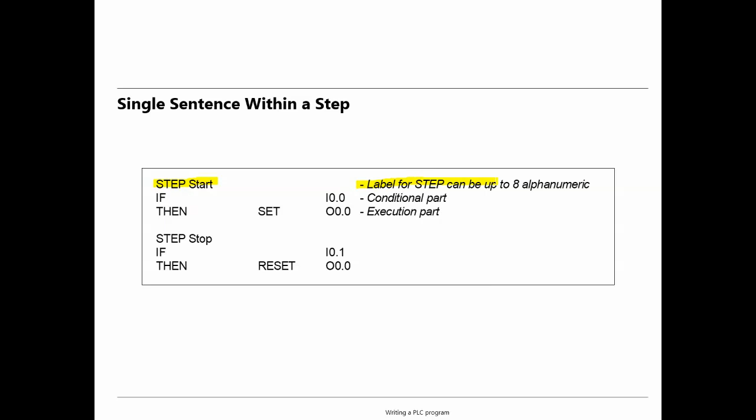And here we have, for example, the conditional part and the execution part. And here we have the step start and reset, and we can write some explanation for that. The condition is in this step; this is the sentence. So if input 0.0, this is the conditional part, and this is the execution part: then set output 0.0. And another step: again the conditional part, if input 0.1, and the execution part, then reset output 0.0.

But later on, if you get involved with software, you will see there are many companies producing PLCs, the hardware, and even if we learn some commands here, they also have some special commands, or they make some modifications regarding the commands. So that means you have to read the handbook of the company that produces the PLC, or participate in a short course to learn about the special commands or special structure of this company's software.

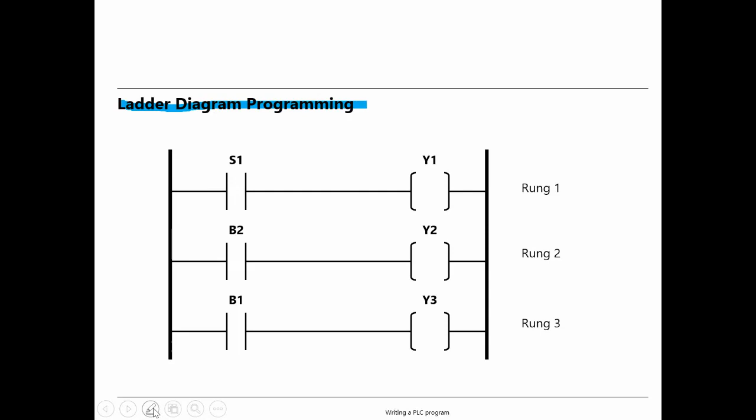So the ladder diagram, what's that? This is the first part, rung 1, rung 2, rung 3, and this is the condition part, if S1. S is a symbolic name, as we already mentioned in our last lesson. Instead of F, S1. S1 is connected to, let's say, input 0.0. There's a cross-reference list or reference list, and in these references all of them are defined. S1 is assigned to the input 0.0.

So these parts, all inputs, S1, B2, B1, and the other parts here, the execution part, Y1, Y2, Y3, we use to address the coils of the valves. If S1 is true, then set Y1. If B2 is true, that means the signal exists, then set Y2. If B1 is true, that means it exists, then set Y3.

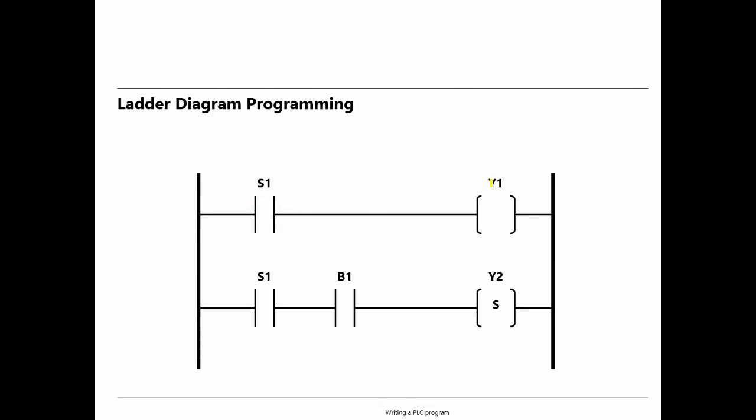Okay. So from the ladder diagram, if B2 is activated, Y will be set regardless of whether S1 was previously activated or not, which we discussed already. And here in the ladder diagram, if S1 is true, then set Y1. And here we have an AND connection, logic AND connection. That means it is connected in series here. If S1 and B1 are true, then set Y2.

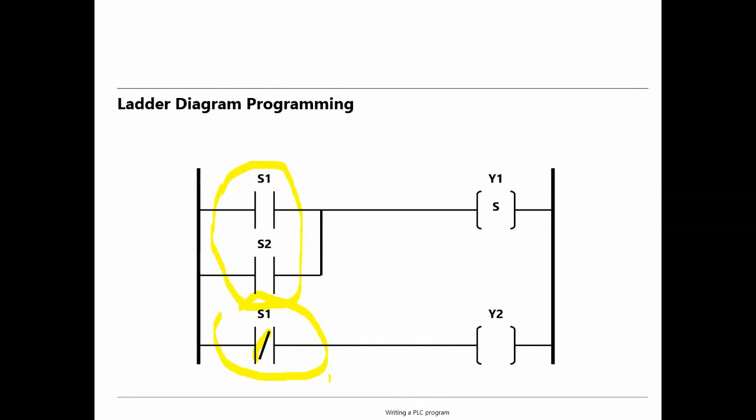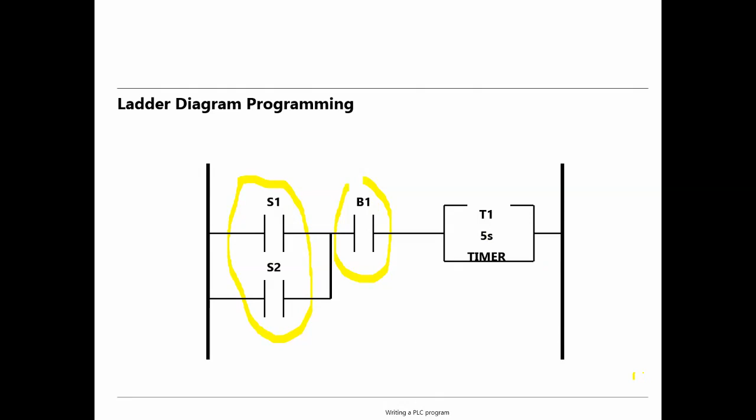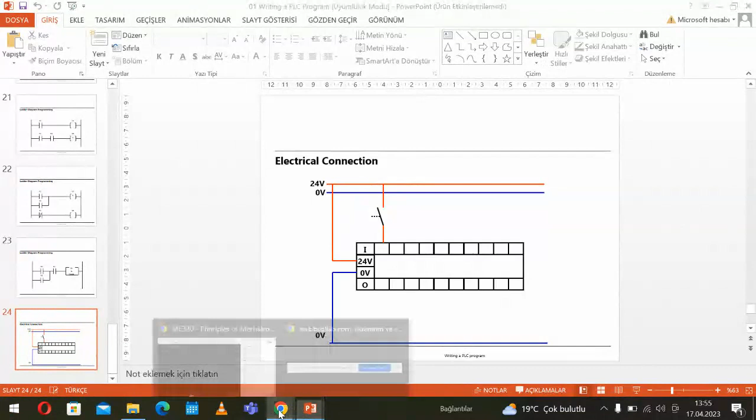Okay, so let's make a short break, 10 minutes. What time is it? Okay, let's say 5 to 2. So we start, let's say, 2 past. And we will work on an example.

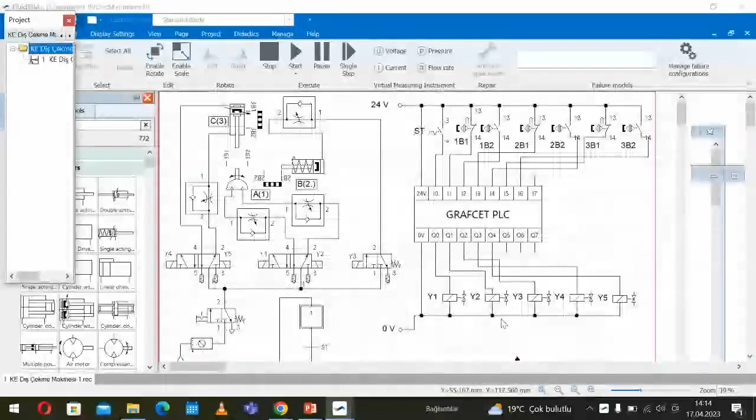I'm going to use two linear actuators. This we did already, you may remember. This is a simple mechatronic system consisting of one linear actuator like this here. Let's start the simulation, and this is our power unit, as you remember. We use pneumatic energy since we use the pneumatic linear actuator here, as we said at the beginning of our lessons.

Can you see the screen? Okay, I guess you see that. I cannot see your response, because I only hear your voice now.

Okay, this simple mechatronic system we created in our previous lessons has one linear actuator, and the linear actuator is a pneumatic linear actuator. That means we use pneumatic energy to do the work.

Could be hydraulic, could be electric, electromechanic, and so on. We discussed it already in the part on actuators. So since we have a linear actuator, we are interested in checking the position of the linear actuator. That means controlling the position of the linear actuator. A linear actuator, you know, executes linear motion.

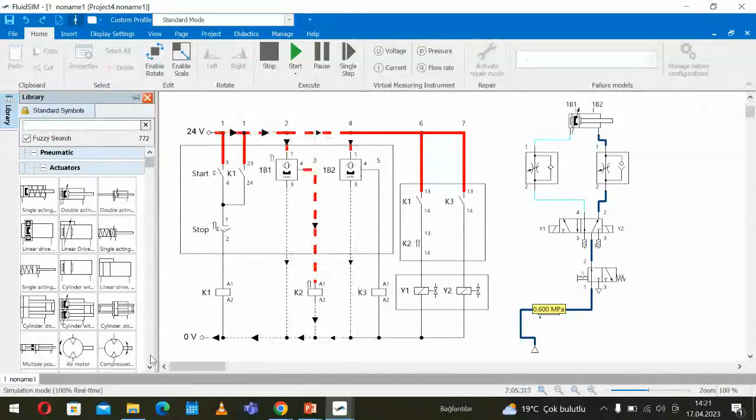So this control system is designed using relays and relay contacts. And we said it is also possible by writing software, using a PLC. We didn't use the PLC here. We just used the relays, and we established the control circuit using the relay contacts. So let's see whether I have it somewhere. I remember we did it.

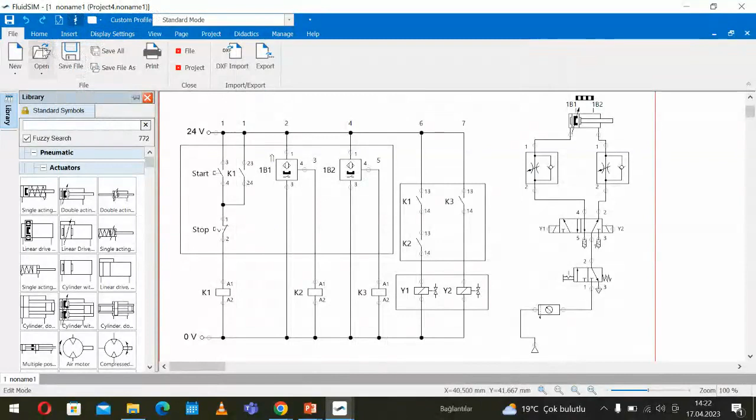Where is it? The pneumatic, is it that? Pneumatic control circuit. Oh. Which one is this? No name project 4. Okay. Project 4, 5. Let's see the 5. What's the 5?

Okay. So this one. Project 5 with PLC. Same project, that means same power unit. We use the PLC here. In this PLC, this is the input part, and this is the output part. All the inputs we connect to the input part, and all the output signals we connect to the output part.

And we also have to connect our PLC to the power unit, to the voltage, 24 volt here connected, and the 0 volt is also connected. You see our 24 volt direct and 0 volt. So if I start the simulation like this, you see we have the energy here, 24 volt direct current, and pneumatic energy also available.

And I have to turn on the pneumatic energy for our linear actuator like this. So then I have pneumatic energy in the power unit and electrical energy for the control system. So again, like our example before realized using relays and relay contacts, if I push the start button here, the first input signal will arrive at the PLC, and then it starts to work like this.

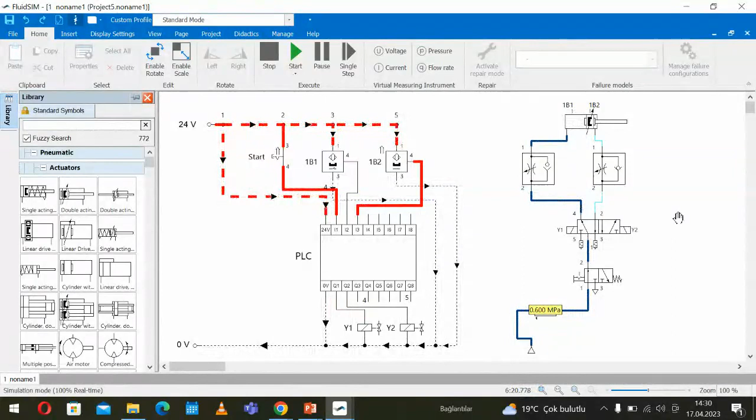Today industrial automation is very important in our industry. All production lines, all assembly lines are getting automated, because we have to produce fast, we have to produce safely. Having humans involved in the production or assembly process to keep the conditions constant is not always simple or beneficial. Therefore, we use automated systems in industry today. We have to produce more, produce precisely, produce the same quality at any time. So industrial automation is very important.

And industrial automation mainly consists of actuators, sensors, network, hardware, and software, whatever you are going to design, as a machine or as a function unit used in the machine. Okay.

So in this example, we have 3 input signals, as you see here: start, 1B1 and 1B2. 1B1 and 1B2 check the position of the linear actuator, and start is to start and to stop. If we push it the first time, it starts, and the second time we push it, it stops at the end of the cycle. And in the PLC we write a program, and it works according to this program.

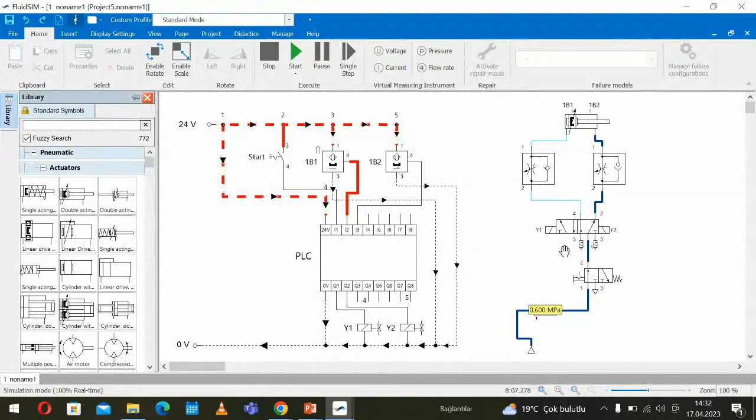What does it mean, it works? The program is executed by the CPU, checking the input signals and what is written in the program, sentence by sentence. According to the inputs and the program, the CPU creates and sets the output signals, which in this example go to Y1 and Y2, the solenoids belonging to the 5/2-way valves, and the 5/2-way valves operate the linear actuators. Do you have any question regarding this simple mechatronic system? No, okay.

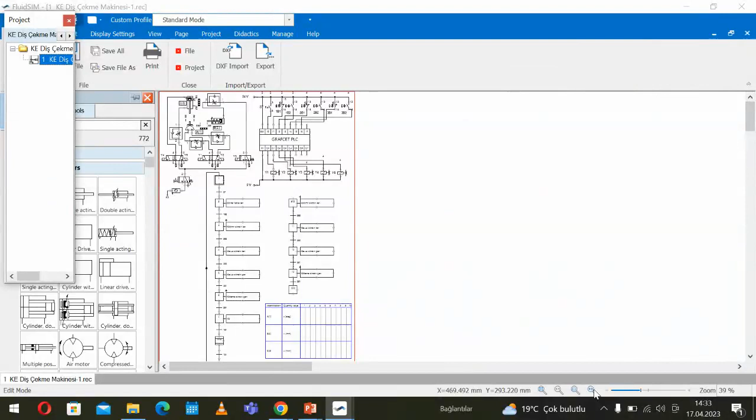So I'm sorry. I will select another one. Pneumatic control manufacturing. Okay, this one. So here we have, you see, we have a problem regarding the view. Where's the view? Okay, here. How can we change the view size? Okay.

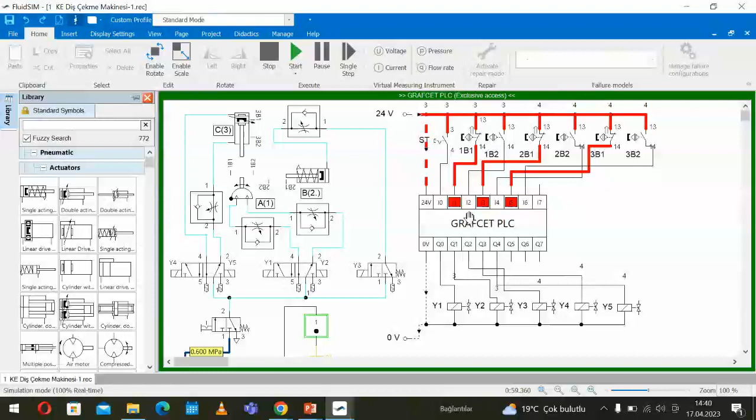We connect all these input signals to the input part of the PLC, and this is the input part here. Some inputs are active - you see now, for example, inputs 1, 3, and 5 are already active. Let's see why they are active. But the start is not active, because the start button is not pushed.

So 1B1 is active - why 1B1? Let's see where 1B1 is. 1B1 is the sensor, the position sensor for the rotary actuator, checking this position - the left position. 1B2 checks the right position. We see here, because the point is indicated, the rotary actuator takes this position, the left position, and since it is in this position, 1B1 is active. Therefore, we get the signal - the PLC gets the signal from 1B1. What about 1B2? 1B2 is not active - both of them cannot be active at the same time on the other side.

And the other one, 2B1, is also active. Let's see where 2B1 is. This is actuator number 2, and 2B1 checks the initial position of actuator 2. We see that the actuator is in the initial position, therefore 2B1 is active, and you see input 3 is active because of that reason.

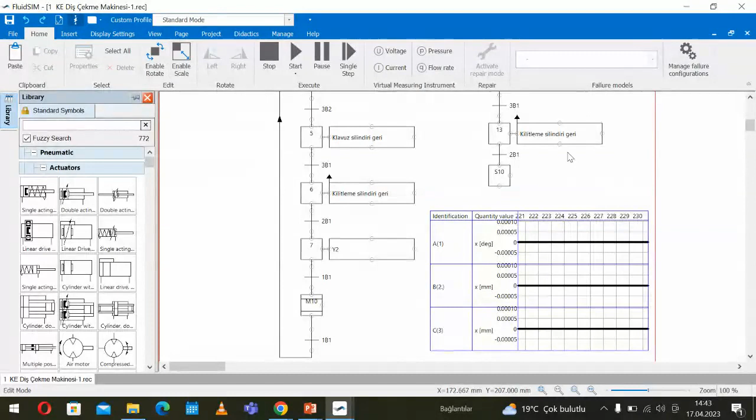M10 means from here, if this condition - this is the conditional part - is fulfilled, then the program jumps to M10. Where is M10? M10 is here, this is a sub-program.

That means, at M10 we have E10, that's input 10, and it comes to this step and continues from here. If it is finished, then it comes back, stops the program at step 10, and from here goes to the start position of the program, back to step 1.

If we have more actuators in our system, the control system gets a little more complicated. That means we have to handle more input and output signals, and maybe consider more complex conditions for the control system. But it is a system - if we learn how to realize a simple mechatronic system with one or two linear or rotary actuators, or mixed, the complex system has the same structure. Therefore it's not a big problem, and I'm sure you can learn and do it.

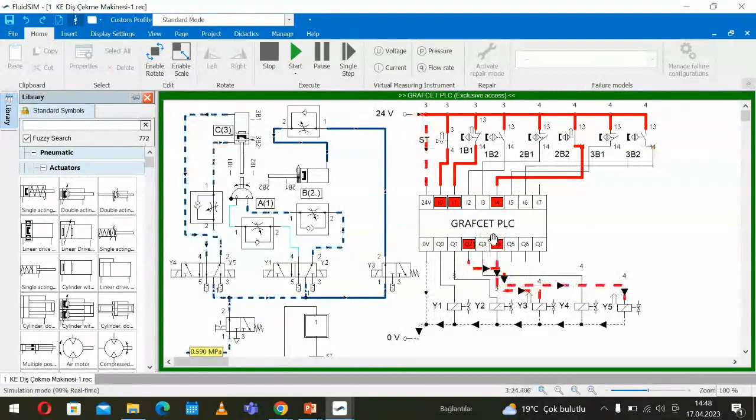That means our control system, PLC, checks the inputs and reads the program written here. You see the program and the sequence of the program: step 1, we'll start step 2, and then step 3. You see green — if the step is active, it gets green like here, then here, and so on. You see the program steps here.

And here you see the motion of the linear actuators are also shown. We have, sorry, one of them is a rotary actuator — this is the rotary actuator, those are the linear actuators. So the rotary actuator takes this position, and the linear actuator fixed, and the other one comes down and makes it cut the thread and goes back, and it repeats. And with this simulation software, we are able to check or to see, to make it visible, all the motion sequence and all those things.

As I mentioned, the first one is the rotary actuator. It takes this position, goes to this position, and stays there for a certain time. This is one position, left — let's say this is the right position, comes to the right position, waits there, and then if it is finished, comes there. In that position, the fixing cylinder fixes, and the drilling happens, and then it repeats again. Comes back, and then it repeats again.

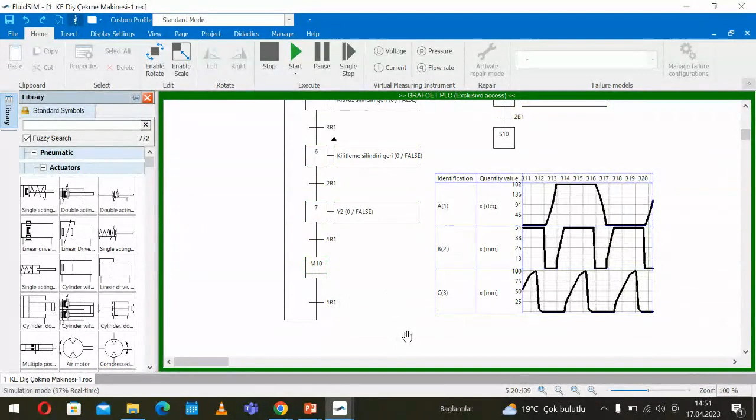Okay, so let's stop it at the end of the cycle. So this is the end of the cycle, and we stop it.

Do you have any question? Is it interesting for you, the simple mechatronic system like this? Maybe you don't listen, huh? Okay.

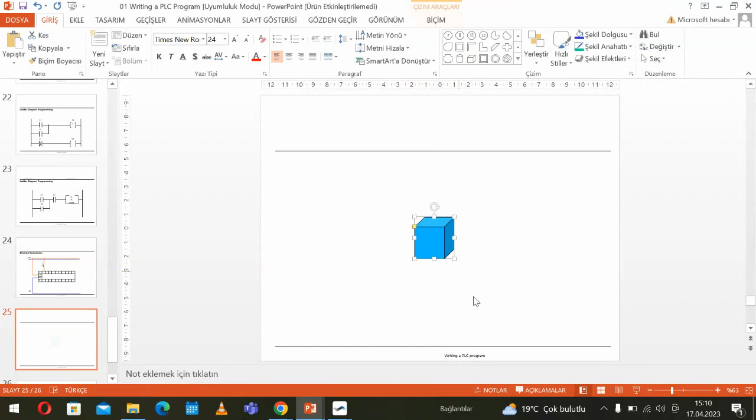A simple mechatronic system consists of two linear actuators. Our scenario is we have one pneumatic cylinder, linear actuator, and for fixing the material, let's say we could have — how can I show? So this is, let's say, our workpiece. Let's have a workpiece here. So we have it. Can you see the screen? Yes, okay, thank you Mohammed, thank you Görkem.

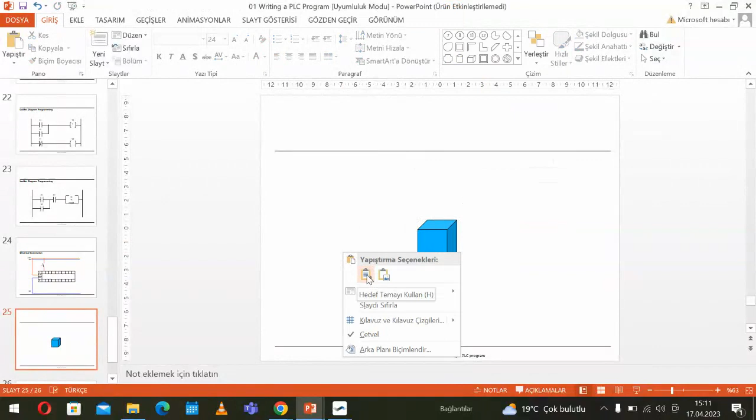Okay, so let's say we have such a workpiece, and we can say this is our workpiece, and establish it. I'm trying to draw the sketch of what we are going to do. Use another color, okay, like this here. Okay, this is the workpiece here somewhere.

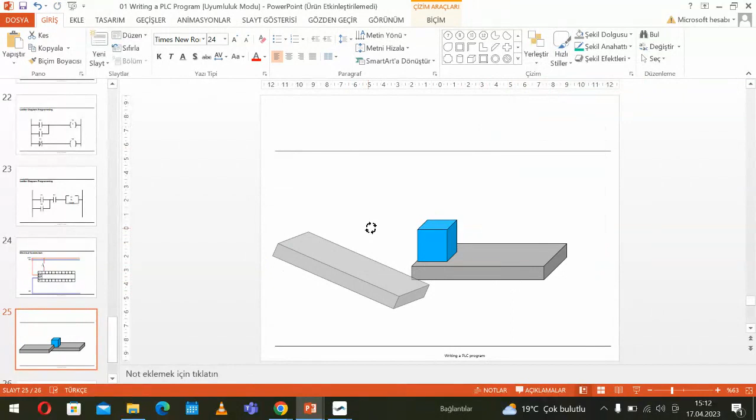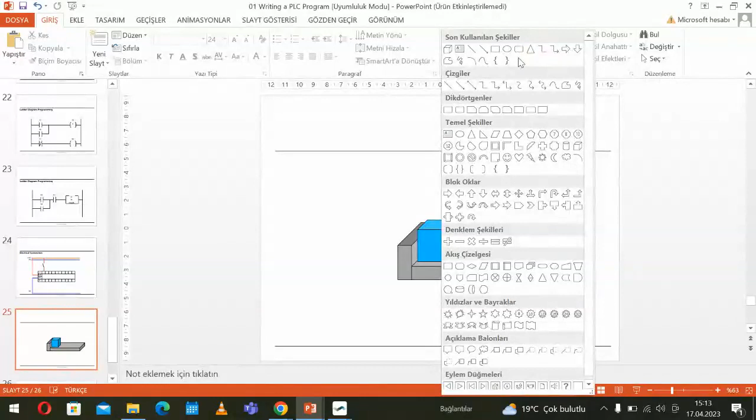And this is another one. Okay, let's. So this is our workpiece, and we want to fix this workpiece somewhere in this position. The linear actuator we are going to use — I can use this one, for example. So this is our linear actuator.

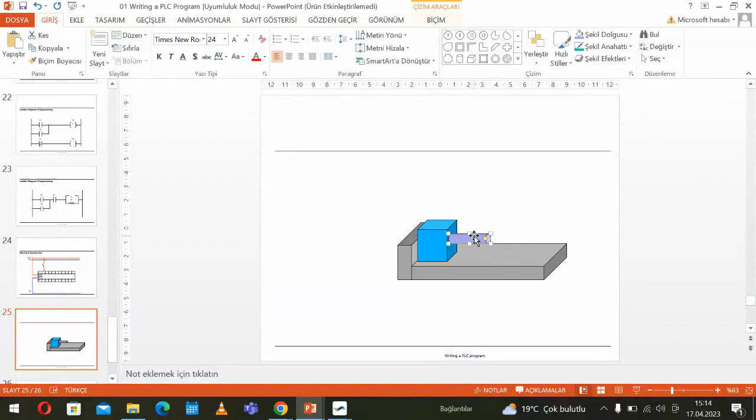One of them is the cylinder we fixed here. Let's choose another color here, maybe this one. So this is our linear actuator and has to be fixed somewhere here. So how can I show that? A linear actuator here. Use this color, okay.

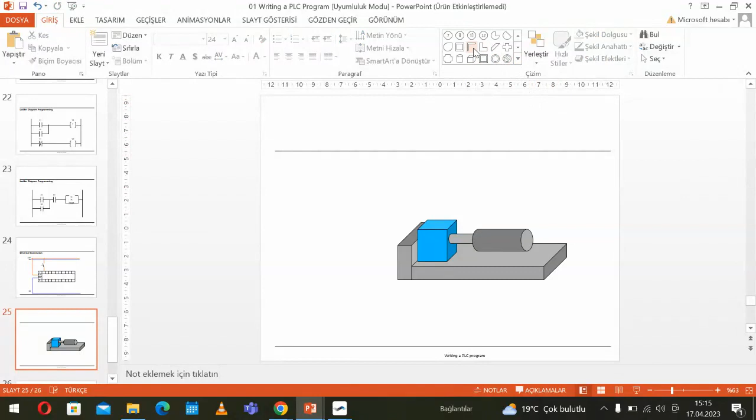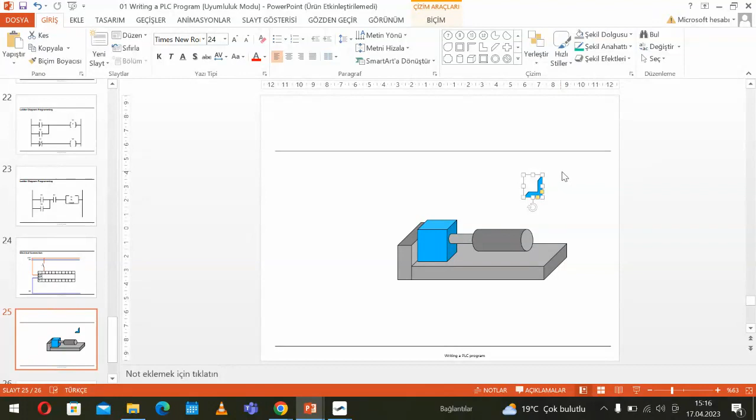Okay, so how can I fix it? I need for this type of component, maybe... okay, let's assume that we can fix it somehow. So this is, okay, our linear actuator — it moves also in vertical direction, like this, huh?

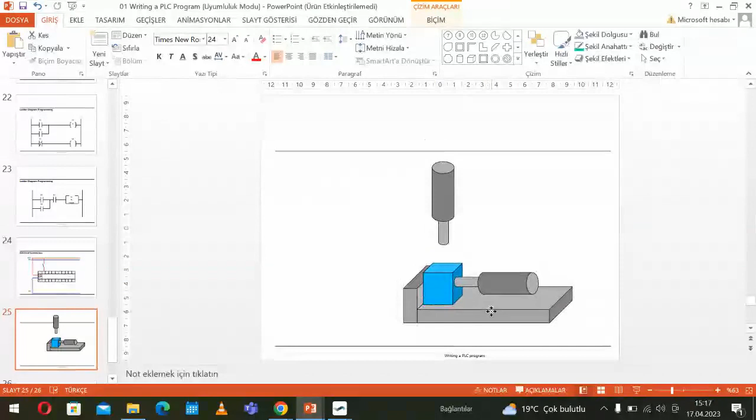And we want to add the drilling component here, somewhere, huh? Send it back, okay, like this. So we want to make a hole here on this surface in a certain dimension.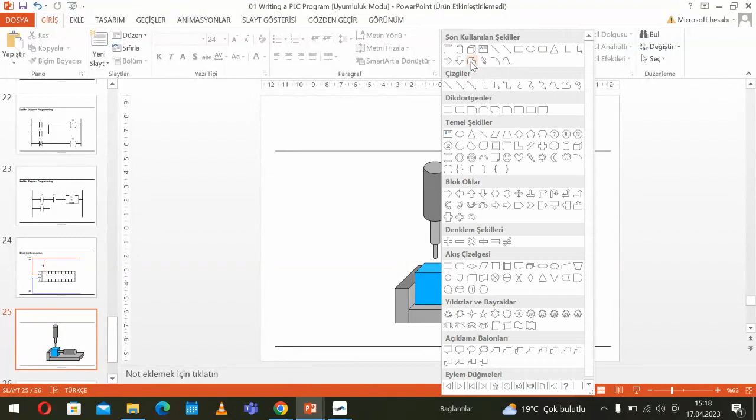So first of all, this cylinder — let's say this is cylinder A, or cylinder 1. Let's use the label: this is the linear actuator, linear actuator 01. And use the black one here. This is linear actuator 1, and we have another one, linear actuator 2. This is linear actuator 2.

Okay, first the linear actuator 1 moves and fixes the workpiece in this position. And then, if it is fixed, the linear actuator 2 moves downwards and makes a hole here, like I can show you — or checks the hole maybe. Could also be quality control, checking the hole inside. Let's bring it here.

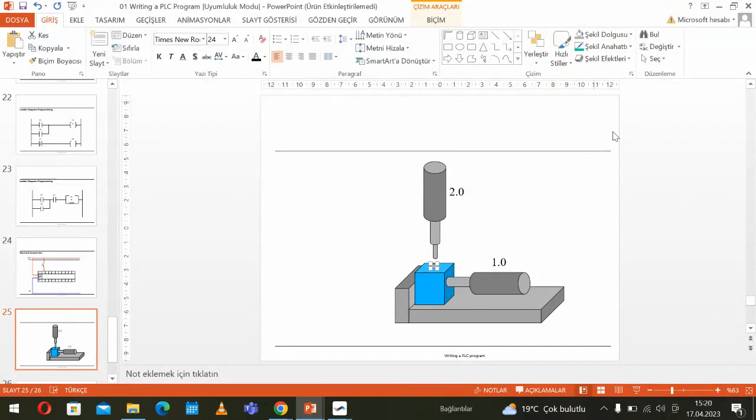Like this. And maybe I can use another color here like this. Okay, so it's checking. We are going to check this hole here. Is it existing or not? The quality control station. This is the scenario, but in reality we have two linear actuators. One of them is fixing or keeping this workpiece in position.

This workpiece is kept in this position, and then the control cylinder comes down and checks whether there is a hole with this diameter. This is the critical diameter. Let's say this diameter is very critical here. Let's use the color red since it is an important diameter. Like here we see that. Okay, we are checking this diameter.

Let's use another one. Okay, and turn it 100 degrees. So, okay, here like this. We are checking whether this diameter is okay or not. So, in summary, we have two linear actuators. Linear actuator 1 is fixing the workpiece in this position, and the second one moves downwards and checks the hole. Is it correct or not?

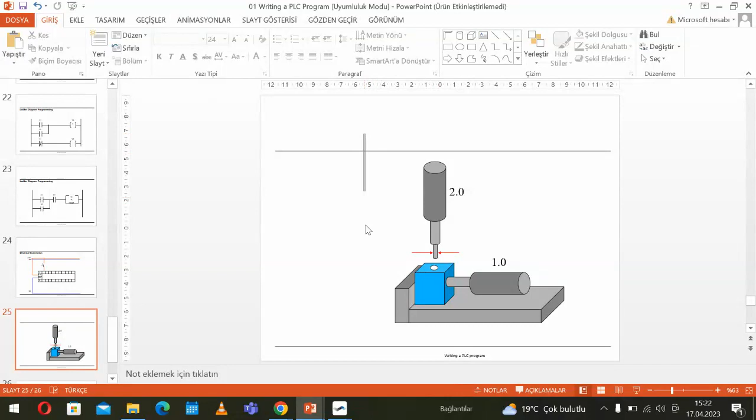So that means we have two linear actuators. We have to coordinate the motion of two linear actuators. So now we are going to define the sequence of the motion. So can we define the sequence of the motion? Let's do it in that way. This is our sketch, and the motion sequence must be like this. Let's say we have here the lines.

Okay, copy. And then the second one here, this is actuator 2. And again, copy that, actuator. Okay, and another one here. Okay, then use this line. Then copy and bring here. That means this shows linear actuator 1, and this is linear actuator 2. Let's bring here. Now we are going to define the motion sequence.

So I'm going to use another color for the line. So let's take this one. At the beginning, all the actuators are in the initial position, and I will indicate the line with the color blue, and the other one is also in initial position. Sorry for that. So it is in initial position, 0 position.

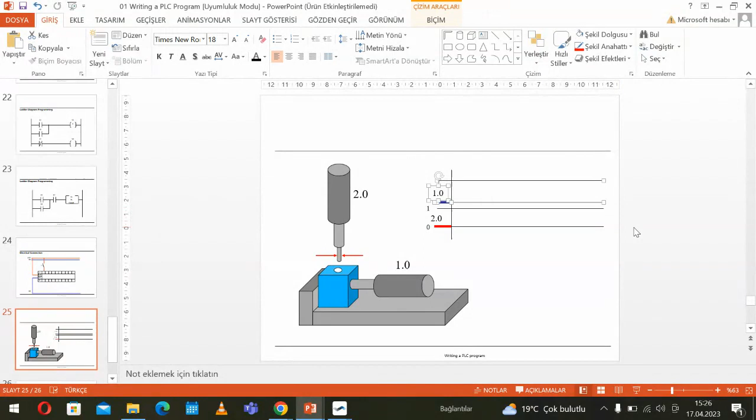So, 0 indicates the initial position, 1 indicates the advanced position. Let's take it a little bit in this direction. Then I will use that also for the first actuator: initial position, advanced position. So this is actuator 1, already defined. This is actuator 2, initial position is 0, advanced position is 1. So let's define this motion sequence.

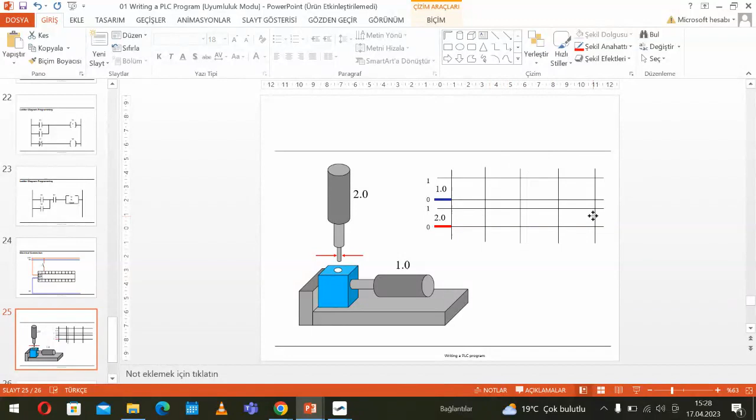If the workpiece is in position, then linear actuator 1 has to move and fix it in this position. So this is the scenario. We have here 4 steps: 1, 2, 3, and 4. First, actuator 1 moves. First step moves here, and I use the same color to make it understandable. During this time, the second actuator doesn't move.

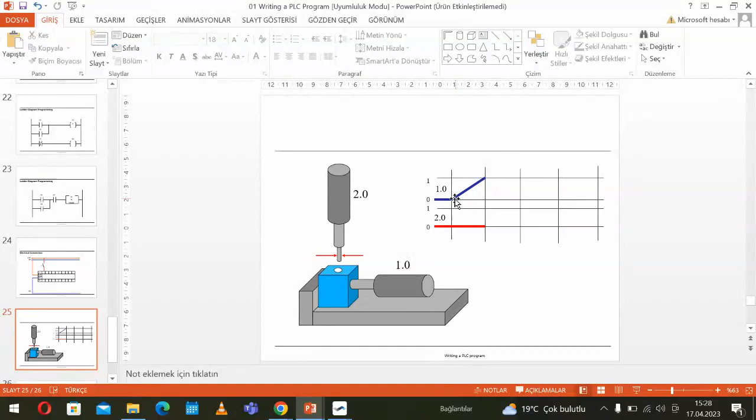Then, if the first actuator arrives at its position, the second piston moves in that direction into the advanced position. Let's use the same. Okay, and during this time period, the first one is keeping the position. That means it doesn't move.

So if the first actuator moves and fixes the workpiece in that station, then the second moves downwards and controls the hole, and after the control comes back into the initial position, and we can show that like this. During this time period, the first cylinder is keeping this position, because it's continuing to fix the workpiece in that position.

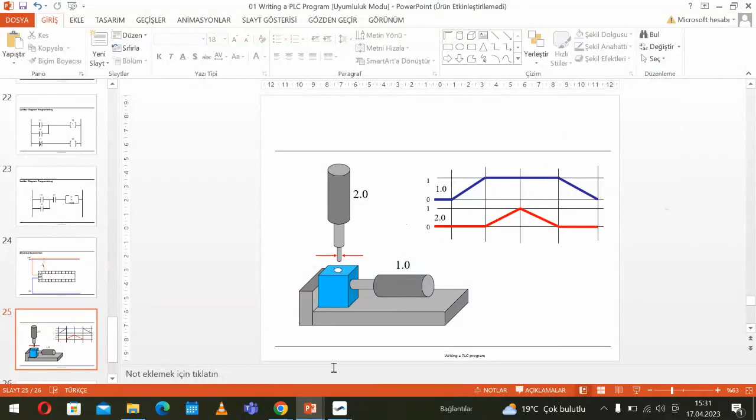Okay, then during this time, the other actuator, that means actuator 2, doesn't move and keeps its position. And let's also keep it like this. And so this is the motion diagram. The motion diagram shows the motion sequence. The first actuator starts to move, and we can indicate this is the first

step here. Let's use this here, copy. This is the first step, and then you see here this is the second one. Then the third step, this is the third one, and this must be 3 actually. Okay, 3, this is 4. I will explain why. This is 2, and this is 1. This is 1, and this is 0 here.

Okay, this is 1 here. Step 0, 1, 2, 3, and here we will have 4. 4 we write here. Where is it? So this is 4. Okay.

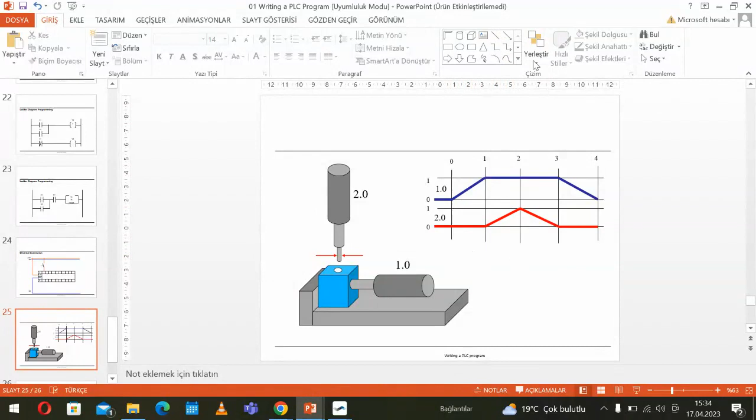And after linear actuator 2 comes back, linear actuator 1 moves to the initial position, and we come to the position where we started, like this here. So this is the final position. Then it repeats again. This is one cycle: first step, second step, third and fourth step, and it starts from 0. And here this is the one cycle time.

Let's show it like this. One cycle time. Okay, so how can we realize that? How can we organize the motion sequence like this? To organize the motion sequence like this, we have to use sensors, 2 sensors for each actuator to check the position. So let's use 2 sensors here.

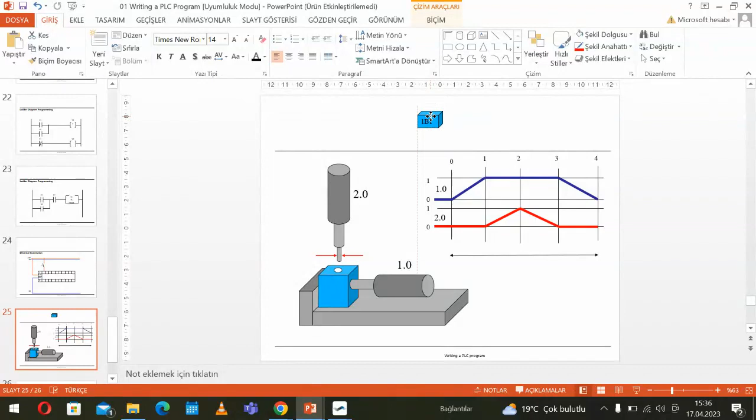And this is, let's say, 1B1. Let's say this is sensor 1 for cylinder 1. We are checking this position, and let's use a different color like this one. These should be sensors, and let's copy that and replace. So this is the initial position, 1B1, and 1B2, the advanced position.

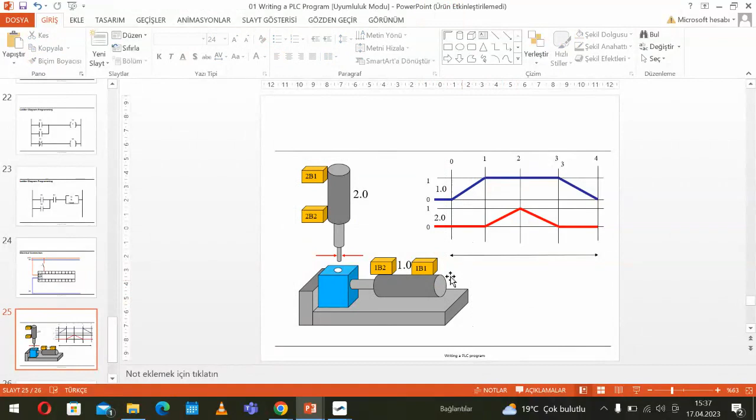And we also have to use 2 different sensors for linear actuator 2, like this here. Since it is actuator 2, we have to write 2. 2B1 and 2B2. So 2 sensors, like this. Let's make it a little bit understandable.

So we already defined this sequence of the motion. The first linear actuator moves forward to the advanced position. Then the second actuator starts to move into the advanced position, and after arriving, checking the hole, it comes back to the initial position. Then linear actuator 1 comes back and loosens the workpiece.

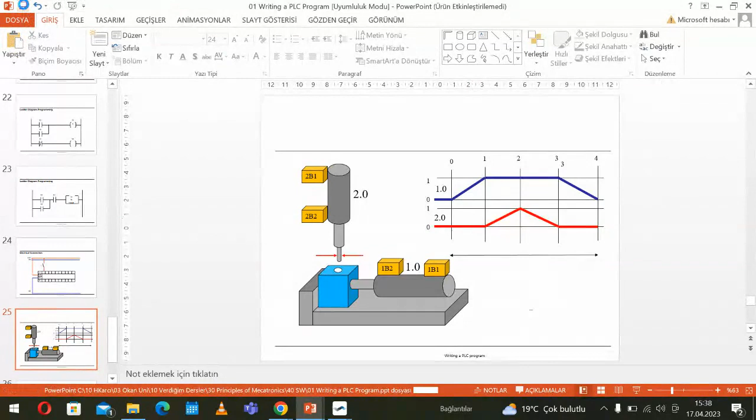So we are going to realize this motion sequence. This is our aim. Let's keep it as it is; we will come back again and see that. Come to the simulation software, and we have to have a new file. And now let's have 2 linear actuators here. Rotation, how can I do that?

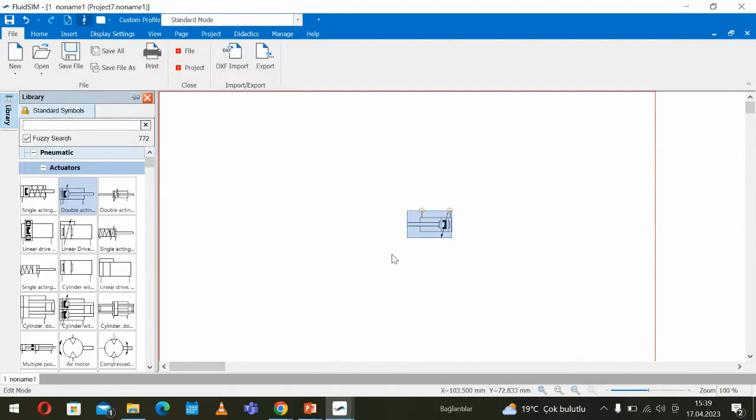Okay. Like this. And the other one is, it will fix the material. Or let's fix it from that side, also could be. And this we have to use, let's say, turn 90 degrees. Then 180 degrees again. Rotate 180 degrees. So, like this.

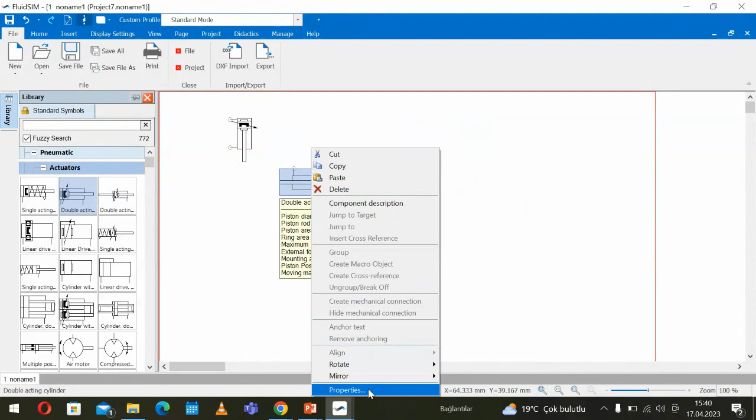Those are the positions. Here we have our workpiece somewhere. And let's bring that here. Okay. And draw that somewhere here. And let's define the sensors for that. This is our linear actuator 1. Properties. Okay, and

actuating labels. This is 1B1, and the start position is 0, and the end position is 100. Oh, sorry, 0 also. The start position is checking here. Then we have 1B2, and since the stroke is 100, let's define it as 100. Okay, good. Then we have to give the name 1.0.

This is our actuator, linear actuator 1.0. Okay. So this is our linear actuator. You see here, linear actuator 1.0, and this is the 1B1 and 1B2. And same for this one. And again, this time we have here 2B1. This is the second actuator. 0 is the initial position.

And 2B2, this advanced position is stroke 100. And also here, right, 100. And this is our actuator, linear actuator 2.0, second linear actuator. So this is also already defined here. Second actuator. And you can see also this is the first one. Okay, you can label it somewhere.

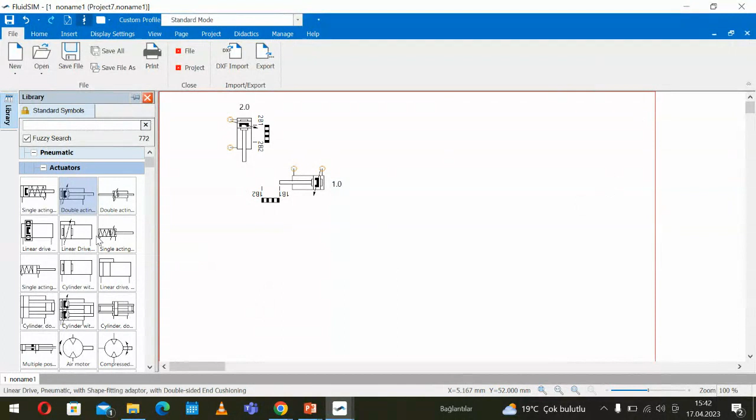To drive these two linear actuators, we need valves, as you remember. This is 5/2 solenoid, 5/2-way valves. So then let's configure these valves. This valve configuration is electrically actuated from two sides. Okay, so I think it is okay now.

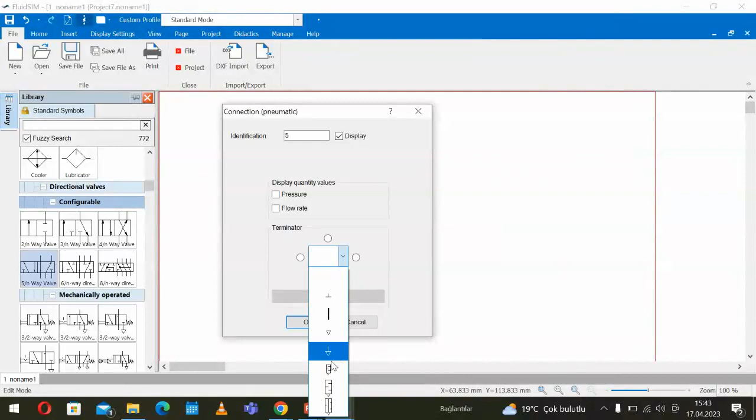And we need two of them, but first we define also the exhaust port. Okay, and here we have also the exhaust port. This small one, good. So we need one of these valves for each linear actuator, as copy and paste. So we need one for this, and this one is for that cylinder. Okay, we can maybe do it like this.

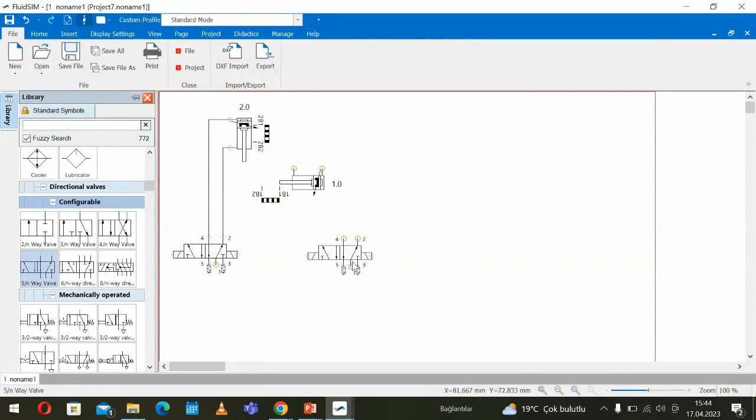So, let's connect here, and this one to here, and also this connect here, and this one is also here. So we establish the connections. Okay. So then we have to define the coils.

Since this is our first actuator, let's take this label here somewhere. Okay, and this label we can take here somewhere. Similarly. So this is coil 1. Or let's start here from this coil 1, Y1. Okay. This is Y2. We are labeling, defining coils or the solenoids like this.

Oh, this is not correct. It must be Y2. Okay, Y1 and Y2. Correct. So then here Y3. And here we have Y4. Okay. So now we finished

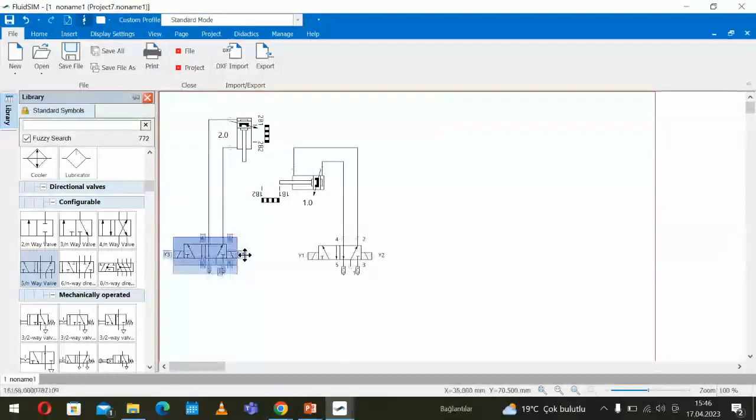the power unit. Actually, we have not finished. We have to add also the source of the pneumatic energy, and we have to use the service unit here, and connect the service unit, and we have to use a pneumatic switch to turn on and turn off the energy like this here. So we can use that here.

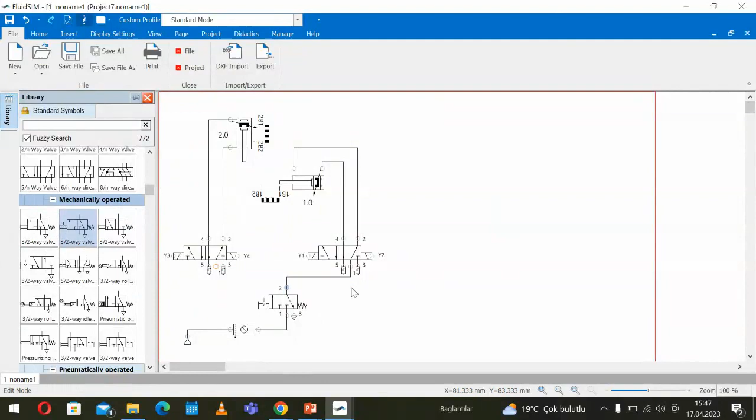Okay. Here. So then our power circuit is now completed. But the power is getting lower, so I have to connect to the power. So then move this to the place where we have the power. Okay. Let's add the power. There it is here. Okay.

So the power circuit is okay. That means we can check the power units, and it is normal. Okay, it can move. Now, all the sensors are there. So then we have to use PLC programming to write a program that functions there. Now, a logic unit like this here.

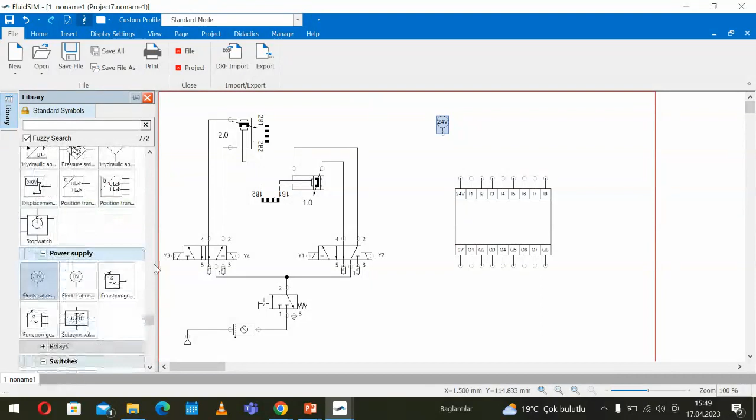0 volt here. Okay, and let's connect the PLC to the power. It's also finished. So what we need actually is the following. We need the input and output signals. So the input signals, where are the input signals? We need a start signal somewhere. This is our start signal here.

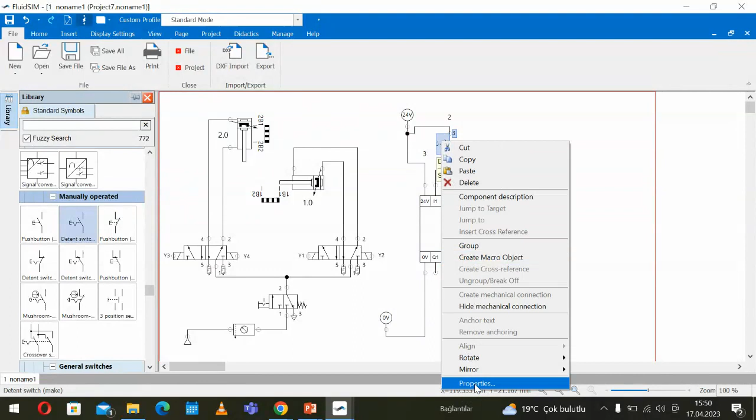And it has to be connected to the voltage here. Let's take it a little bit in that direction. And this is the input. Let's say we use the first input for the start signal. Let's indicate it with ST, start signal. ST is a symbolic name. Okay, and then B1, B2, B3, and all those signals. But I'm going to use simple sensors because I don't have enough space here.

Okay, so then let's use that. Here, let's indicate a magnetic limit switch or reed contact. Okay, could be reed contact, and label it 1B1 like this. It's also connected to the 24 volt, and this is our input 2. Okay, and let's copy it. It's not indicated 1B1. Why not?

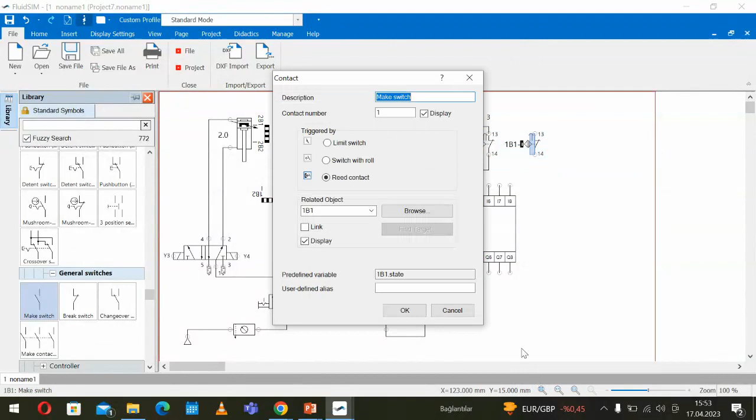And this is 1B2. Must be 1B2. We have to change the name to 1B2. Here, 1B2. Okay, and connect again here. And this is our input. 1, 2, 3. Okay.

Let's move it a little bit to this side. Okay, and in total we can move this also a little bit, because I need place for the other sensors. Okay, here let's copy that and also copy and paste here the other sensor.

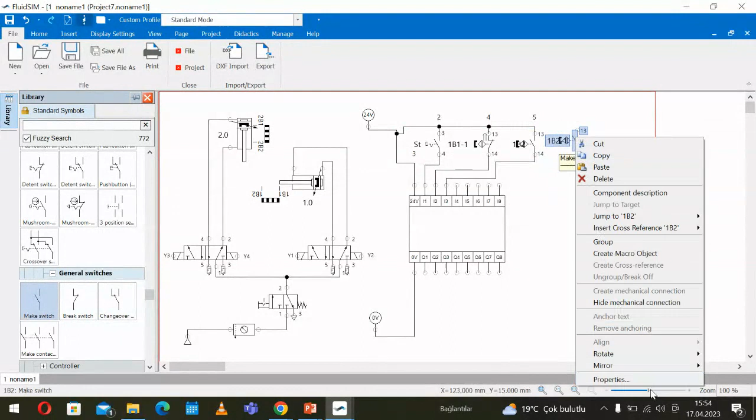This is 2B1. Let's write 2B1. Okay, this is 2B1. Okay, and then the next one, let's once more paste here, and this will be 2B2. Let's open properties right here. Okay, 2B2. Okay, this is also finished.

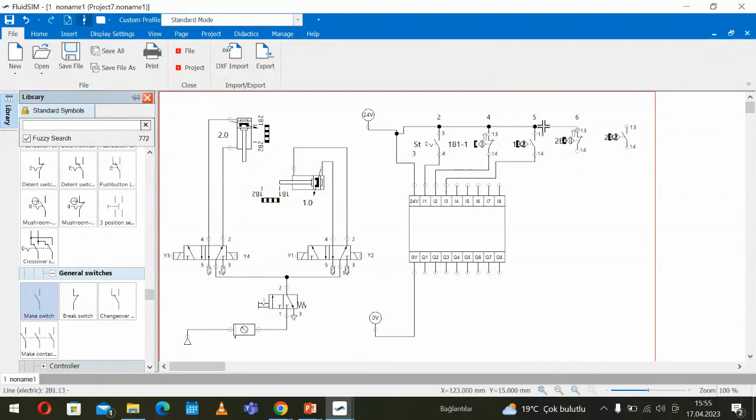Now let's connect to the 24 volt like this here. All the inputs, and this we have to bring down a little bit. And then here input signals. Okay, and this is another input signal. You see, all the inputs are connected now. So we connected all the inputs. We have 5 input signals.

Start, 1B1, what's that? This is somehow a problem. 1B1, where is it? Where is it here? 1B1, okay, 1B1, come on. 1B1, okay. So this is 1B2. This is 2B1. Okay, 2B1, this is 2B2.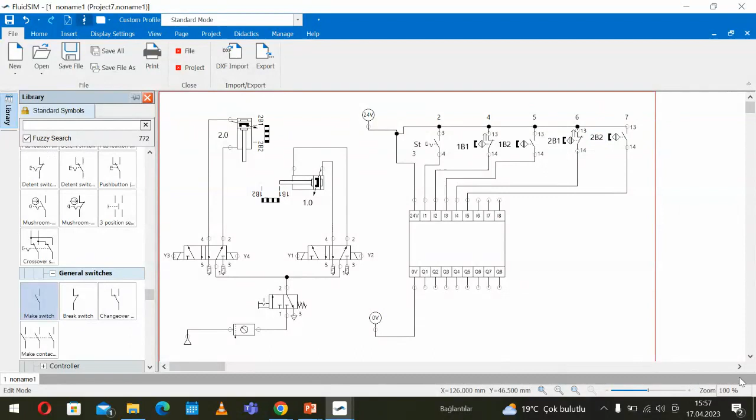Okay, so now the outputs. We have to connect also the outputs. Where is the output? Outputs are the solenoids. We have to select the solenoid somewhere. Find the solenoids. Where are the solenoids? Solenoids, control central, manual operation, and actuators. So no, where is it? Here. Here must be the solenoid. Okay.

No, this one. Okay. So we have solenoid 1 and solenoid 2. We need 4, 3 and 4. So let's define it. Solenoid 1. The name must be given here, Y1. This is Y1. Okay. And this is Y2. Okay, this is Y2, this is also okay.

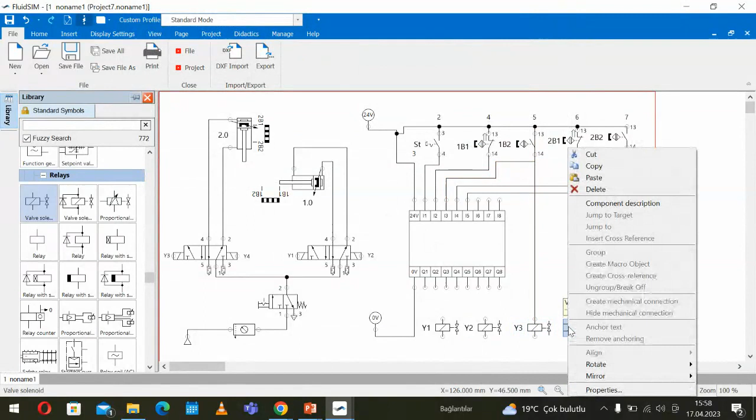So, and here, this is Y3. That's right. Y3. Okay. Good. Okay, this is Y4. Y4. Okay, here. That's Y4. Okay. So all solenoids, the outputs, are also defined. Now we have to connect them.

So this must be to the ground. 0 volt connected and 0. Okay, and this is also 0. So Y1 must be output 1. Output 1. Okay, and this Y2 is output 2. Okay, output 2 and output 3 here. Okay, and output 4. So all the outputs are also connected like this.

So you see, we established the hardware, we established the circuit, and we connected all the signals, input and output. Now our problem is to write the software. How can you write the software? We said first of all, linear actuator 1 has to move from initial position and fix the workpiece, and then linear actuator 2 moves down and controls the hole and comes back, and then linear actuator 1 comes back to the initial position. This is the motion sequence.